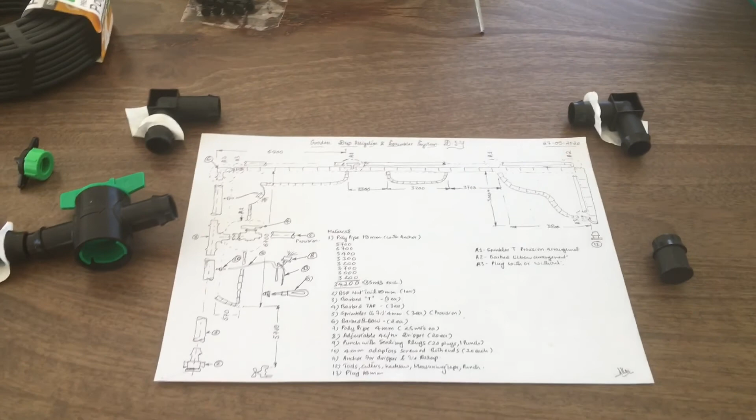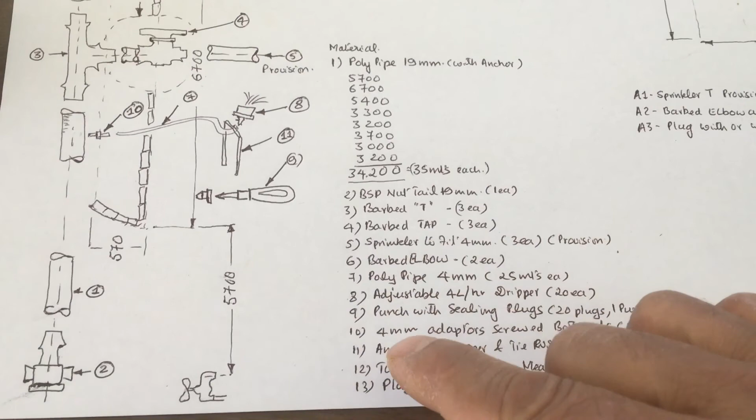Today I'm going to do a beautiful garden drip irrigation and sprinkler system DIY project. For that the plan is ready, very simple, easy. All the material what we are going to use has been decided. We have done our measurements correctly. We know what we need to start and finish this project.

So to start with, the idea of doing this is to maintain a good garden and have adequate water rather than too much of water.

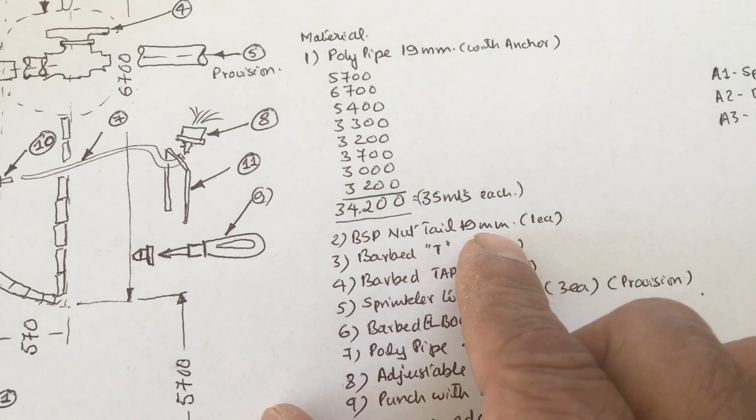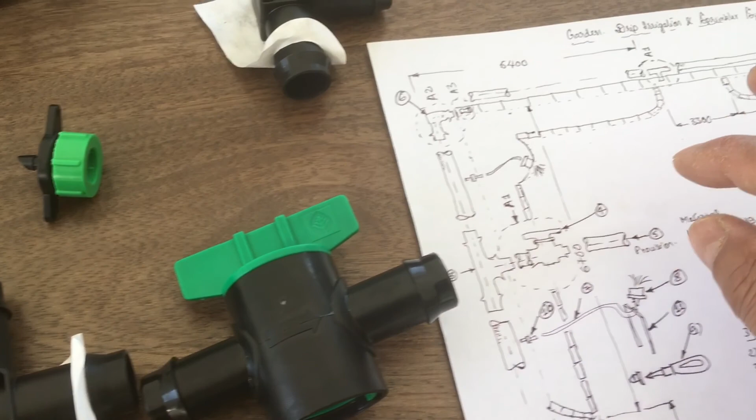Nut tail 19 mm, so that's where the water source comes from, and then we will connect it to a poly pipe. That poly pipe will be clamped and then anchored. Then we will connect it to a T and put another poly pipe connected with a valve, and then probably we will look at how we will engage a sprinkler system here.

Forward we go, we add another 19 mm poly pipe where we will tap this beautiful adapter using this tool by making a hole in the pipe. We make a hole in the pipe and the adapter will go on the pipe, and then we will connect a small poly pipe which is 4 mm and then connect it to a dripper.

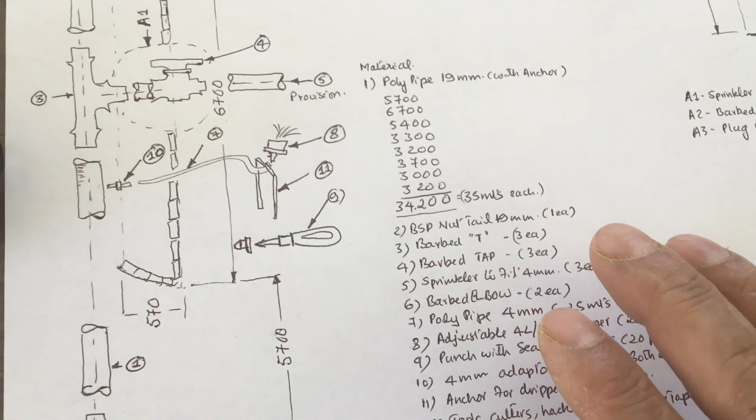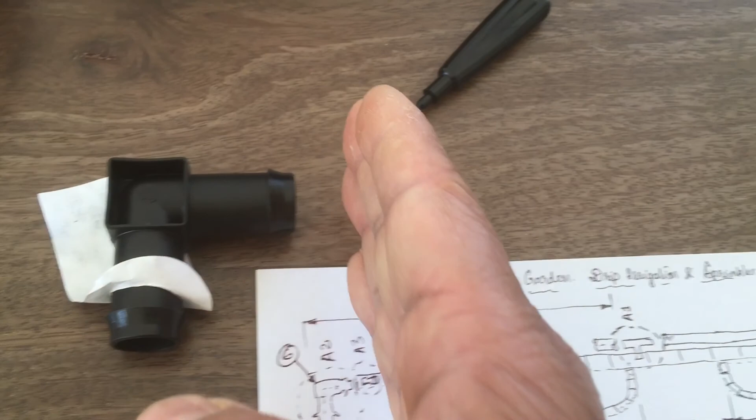All the names and all the material are here. Every dripper will be anchored using an anchor as well as a tie wrap. These are the plugs we use to close. If you need to plug a dripper that you do not want to use, you can use this to close them. And we will move forward by putting an elbow, plugging it here, and then doing the rest of the project, or continue with the project.

And it's mentioned over here, A1 is a sprinkler provision. We go further, A1 another sprinkler provision.

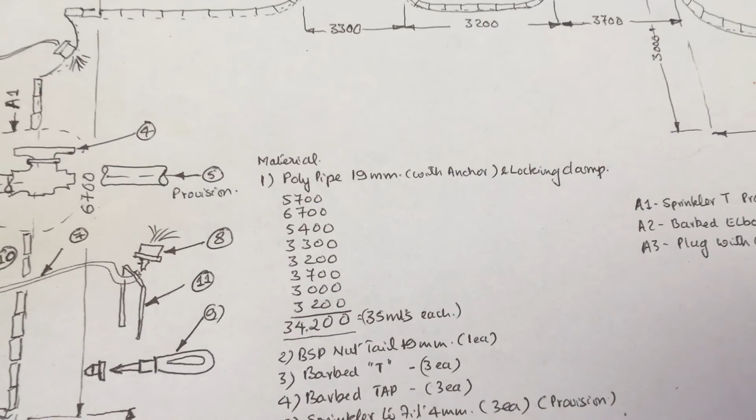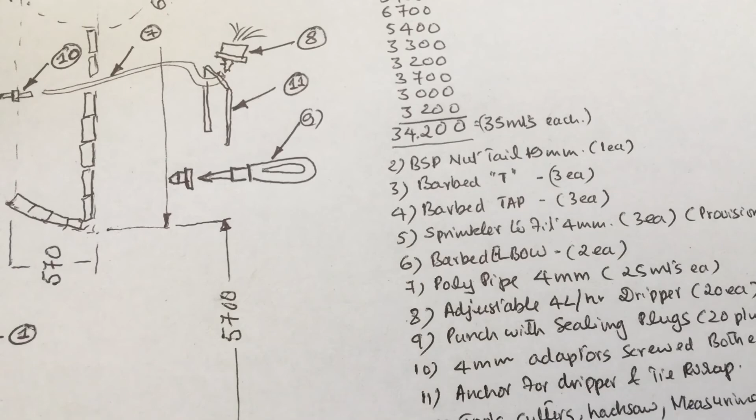So let me get you familiar with the parts we are using. Poly pipe 19 mm, this is the poly pipe which is 19 mm. Then we will talk about the locking clamp, this is the locking clamp. This is the anchor. Here we start with the first, which is number 2, BSP nut tail 19 mm. This is a T, this is a tap, this is a dripper, this is an adapter, poly pipe 4 mm, elbow, this is a punch, an elbow, and then we have a plug. And also you have anchors and a tie wrap and the beautiful tools.

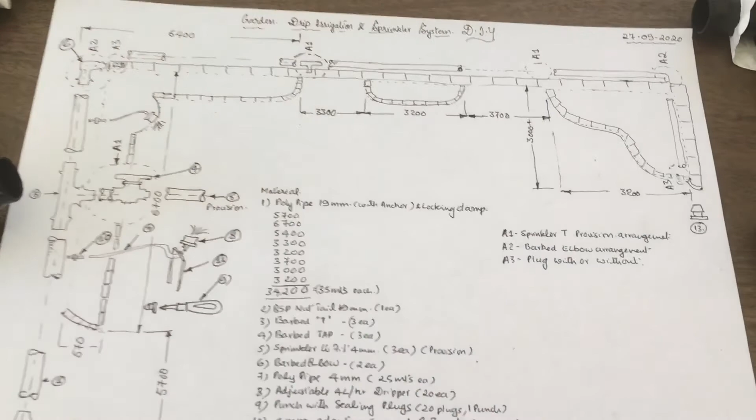Very simple project, you can all do this at home. Don't waste water just pouring and pouring and pouring. You need to drip irrigate your plants for them to get adequate water. Water is very important for your plants.

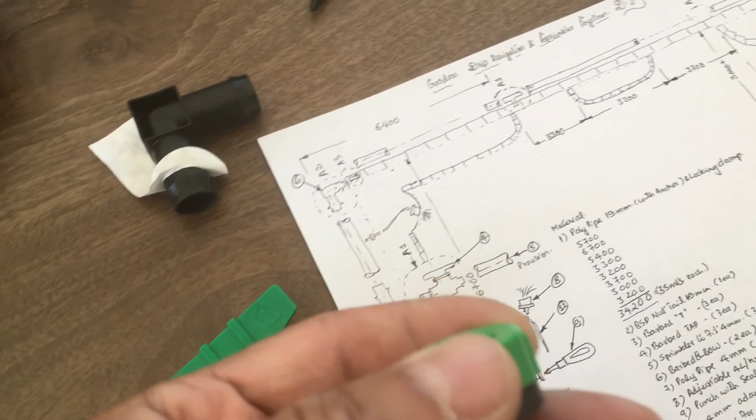So these are all barbed fittings, so it goes easily inside the hose. There are no threads involved here, they're all barbed fittings and very easy. And these are beautiful adjustable 4 liter drippers. You can turn them around and increase or reduce the flow. So that's where we will start.

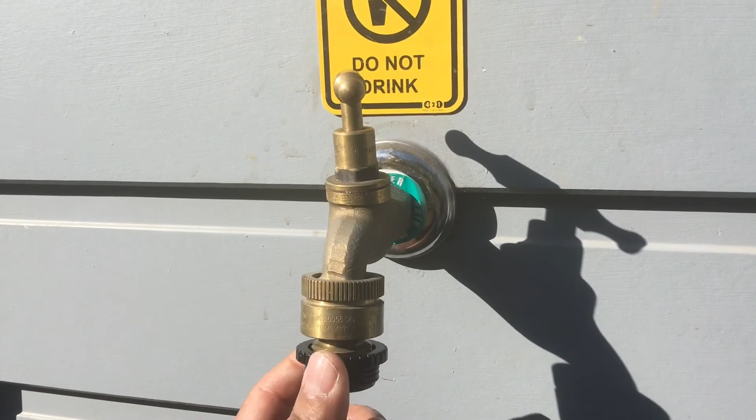We'll connect this adapter here and we will run the poly pipe from here. So this is the area we will entirely install the drip irrigation all around here up till that end.

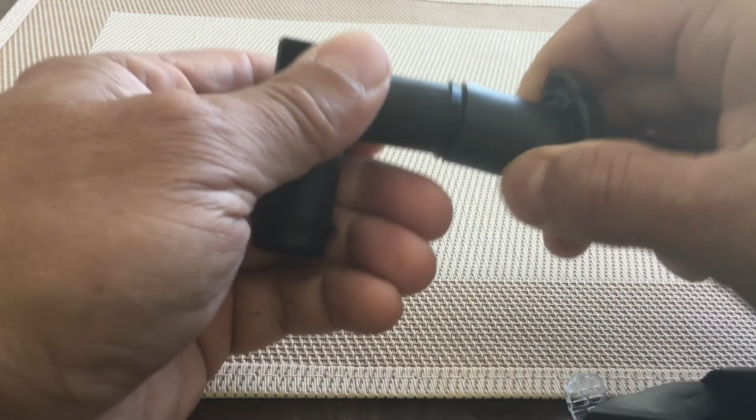So let me demonstrate to you one connection. I put a hose clamp here and then I've got an elbow, a barbed elbow, and this should go in tight inside. It's a bit tight, but you can push it in and then you lock it.

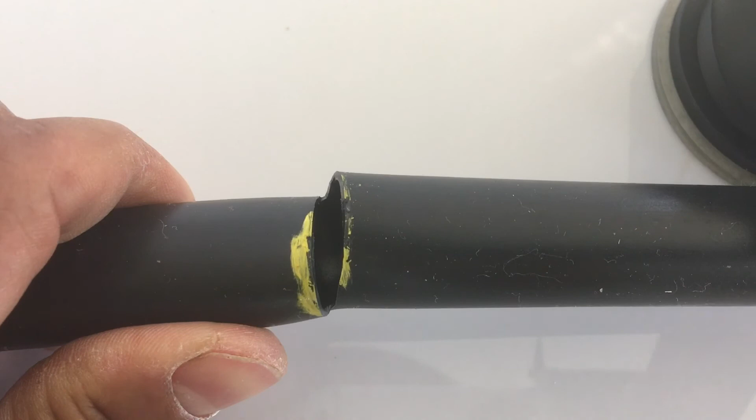Always good to mark correctly, and then we will cut. Try and cut it as straight as possible, very important to make a straight cut. Use a nice knife, but be careful of your hand.

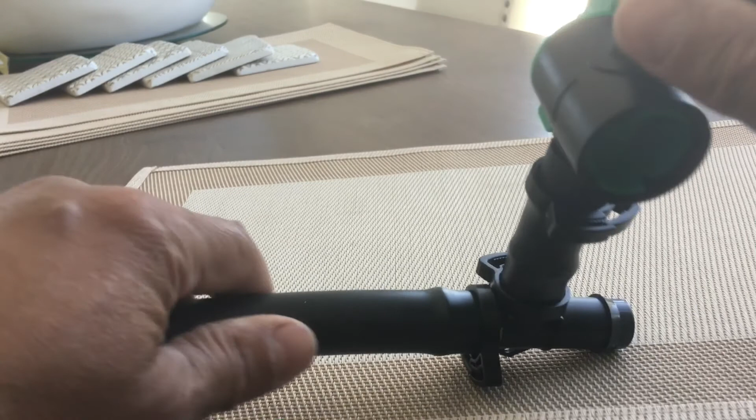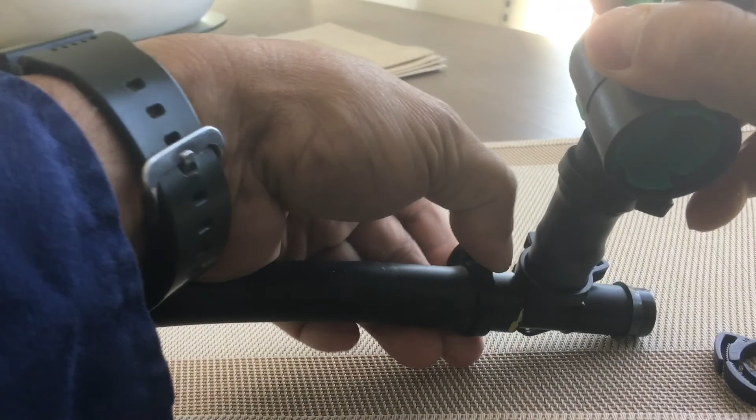Now you will see I've done my next fitment. The elbow is in place, the clamps are in place. You could put the clamps after or before, because you have the ability to slip the clamp through the hose that way, so it's not a problem. Make sure it's all straight, nice, and you can lock them.

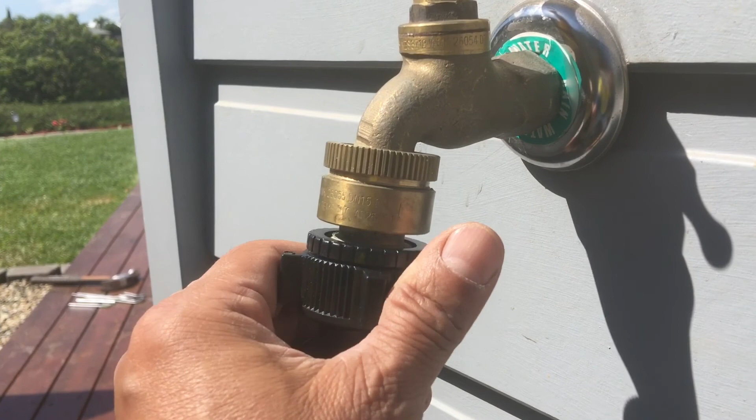So the main installation is complete, but I need to now put the drippers. It's all running that way and going all throughout. This is my provision for the sprinkler, and then we go.

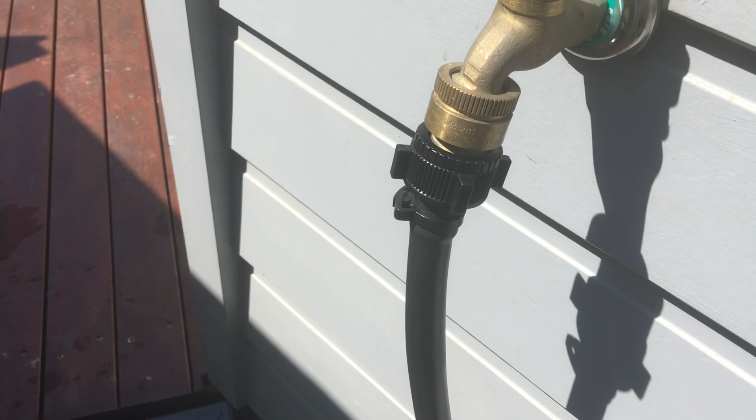And we will end here for today. Let's now do a test and see if there are any leaks. So far so good. Test. No leaks here. That's a good job, so it's leak free, which is good.

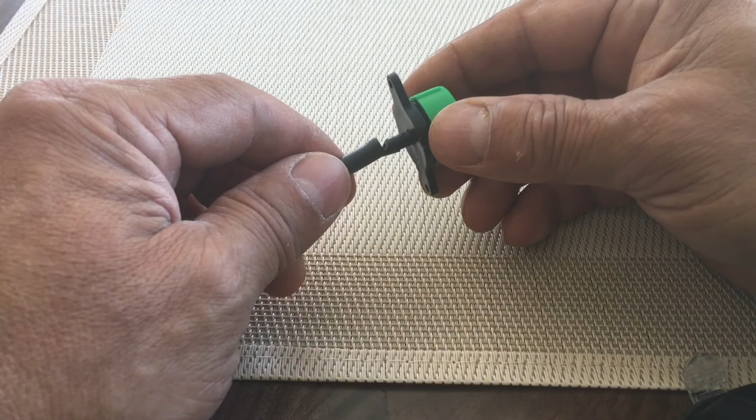Now we will install the drippers. I'll install one dripper as a demonstration. There you go, it's 4 liters per hour, and on the other end we will install this adapter. In fact, the adapter can be screwed on that way. And just make sure that the ends are 90 degrees and straight as possible, so that you get a good seal, tight.

Alright, so I will demonstrate to you one plant. That's the pipe, that's where the water has to go, and I will make a hole here now.

So there was a bit of water pressure, so you need to release the pressure before you prepare the entire line. Before, with this adapter, you screw on, push the hose in on that adapter, make sure you tighten, then place your dripper here and install your anchor.

Okay, go, make sure you close to do a leak test. So let's now set the amount of drip you need.

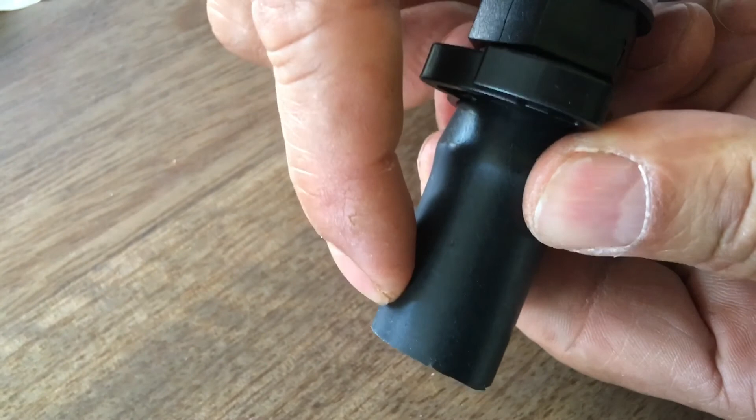Now I got a hose clamp here, tighten it, and then on the other end it will go on the tap at the sprinkler outlet. So I've made the connection here, let's tighten the clamp.

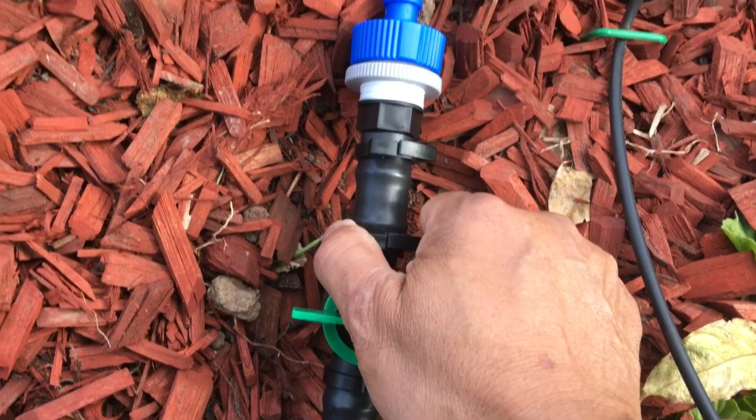From here I will connect it to the sprinkler. So we'll do a test now with this rainwater irrigation and sprinkler system.

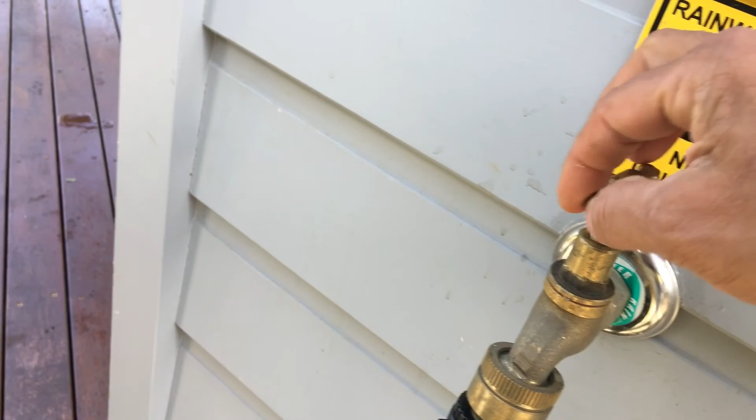Wow, this is good. This is a good connection. This is 12 mm. This is 19 mm. Okay, so it's a 19 mm valve with a 12 mm hose and the sprinkler system.

So you adjust your water based on your sprinkler, and if you feel your sprinkler is not sprinkling enough, you can play with your valves and shut it down or increase. You can play with this valve, either fully open or half.

So it's time now to stop the job. Close the valve. You can irrigate twice a day, thrice a day, depends.

So the phase 1 is complete. We will duplicate phase 2 similar to phase 1, and if we have phase 3, we'll duplicate phase 2.

So you have to make sure your dripper edges are as square as possible, nice square 90 degrees, so that you can get a good flush, a good contact, and there will be less chances of any leaks.

And if you're having trouble tightening the adapter with your hand, you can use a spanner. Yeah, just use a nice right hand direction, also for the dripper. But you always have the opportunity to use some soap, so they slide in nicely, right?

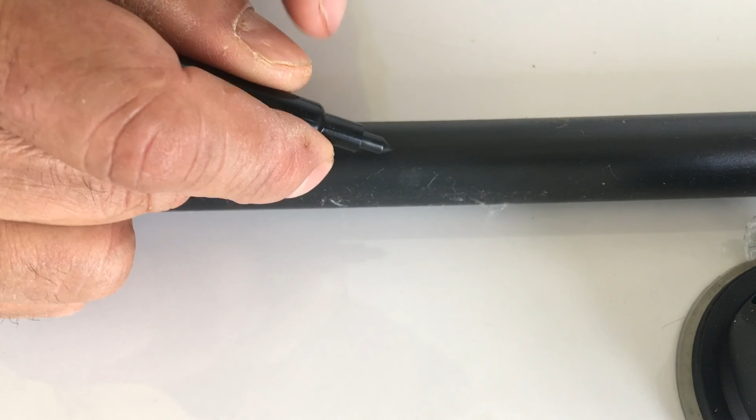So here I'll demonstrate to you how we will make the hole as well as how we will fit the dripper pipe. You just need to go that much, okay.

That's it. Now let's install the adapter with the dripper hose and the dripper.

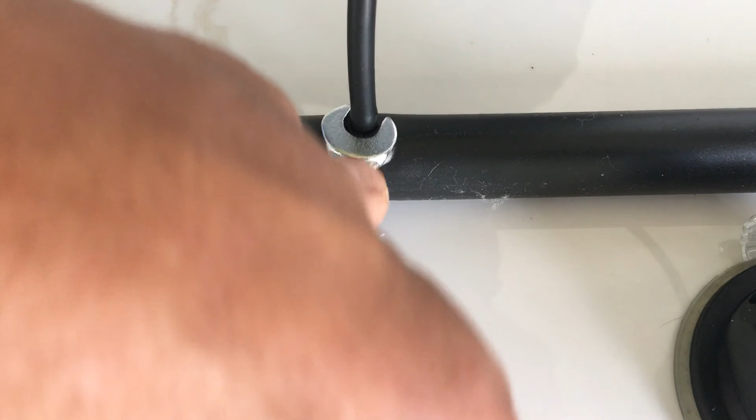Then we screw it right hand. Try and use a spanner. If you have a few leaks, not to worry, but if you want to put Teflon tape, please do so, right? There you go.

So this is known as a bench installation. So it's very important to make your drippers as close as possible to each other. So that's the thumb rule. You need to reach here.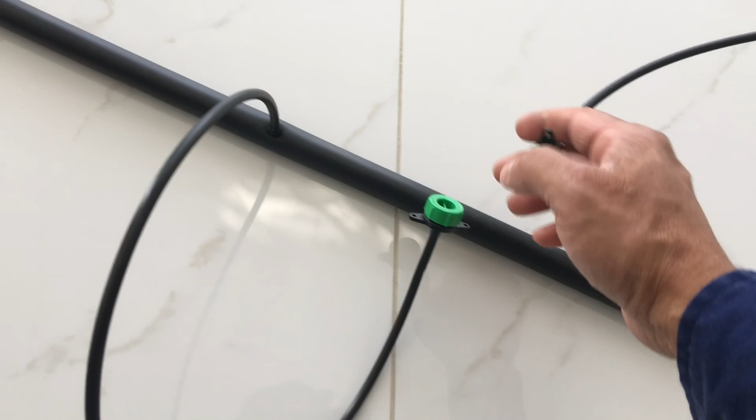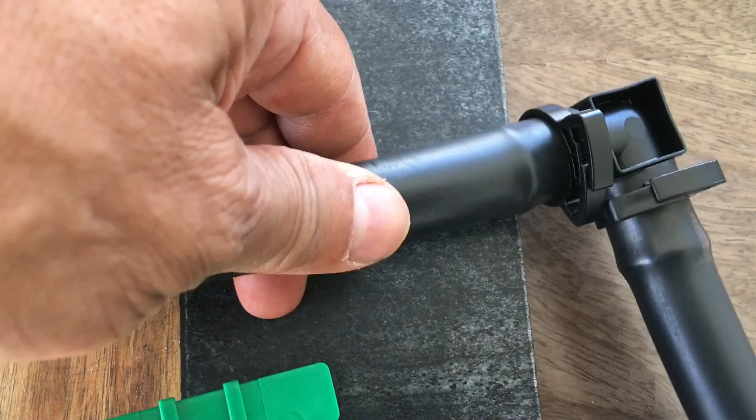Make sure the direction of the water flow. And to let you know, these poly pipes can withstand sunlight, but I'm not sure for how long, but definitely it is fit for purpose.

Phase 2 is complete. Connected, drip irrigation going on. So the provisions are very simple.

I have a hose here which I can use. You can use the tap. You're sprinkling there. And also at the same time you are using your drippers to irrigate your plant.

So this drip irrigation and sprinkler system, all happening at one time, is designed not for the lazy gardener, but this is smart gardening. Therefore, drip irrigation also considerably reduces the water consumption.

The water use reduces quite a lot, and the goal is to minimize the water consumption and maximize the plant condition and the plant quality, and maintain plant health. That's the goal. Minimize the water consumption and maintain good plant health.

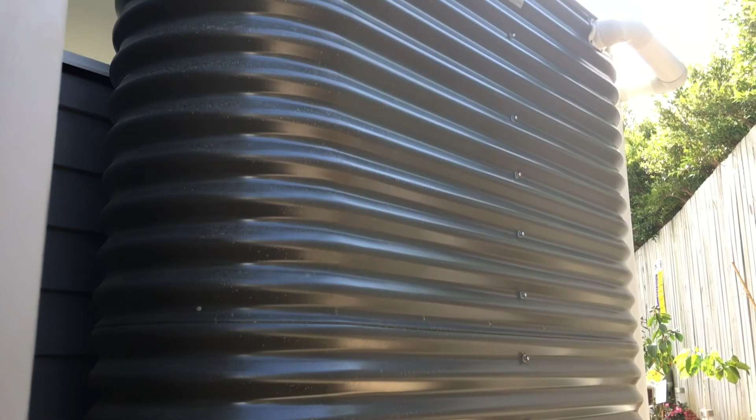So this is the rainwater tank. It's got a capacity of 2000 liters. Okay, so this is the tank suction and it discharges to the rainwater lines. If the level comes low, the water will flow from the main council or municipality line.

So the stage 3 of this drip irrigation project is complete, and this is the last stage where I have a provision to connect to a sprinkler.

And also I have a nice bird bath. Is always good to have these kind of bird baths, in fact they attract a lot of birds and quench their thirst, which is very important for the environment, isn't it?

So the drip irrigation and the sprinkler system project is complete.